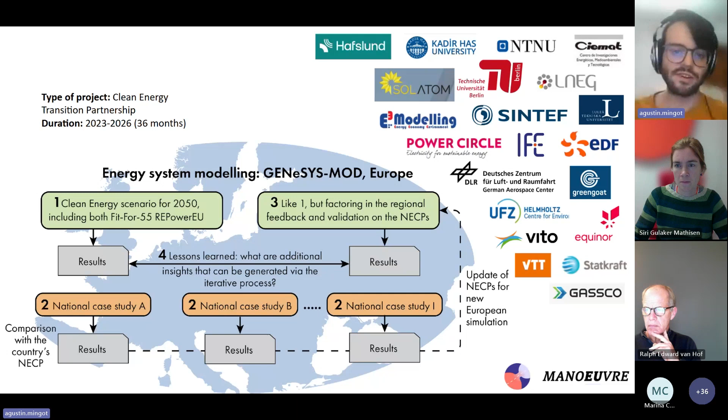Inside this project, at Solatom and also Ciemat and others, we are working in power to heat and thermal energy storage. At Solatom, we are a solar thermal energy for industry company, and we see this energy as complementary.

I will not go into the specifics of the technical design of this equipment, as other presentations will cover that. I want to focus on the importance of this design for the general simulation, for the future and prediction of it, because when designing a power to heat system, there are certain characteristics that are intrinsic to the design.

Any renewable energy has to define what peak energy output it can deliver, what total annual energy it will produce, and what would be the cost of that energy produced. We work commercially, and the balance of these points is crucial for bringing this energy into reality.

There are also more specific points we have considered when working with industry. When will you introduce the heat? Where - are you going to generate steam and add it to the collector? Are you introducing heat into the conventional boiler? Are you boosting the water return from the condensate? Are you working with direct renewable generation, or are you including thermal storage?

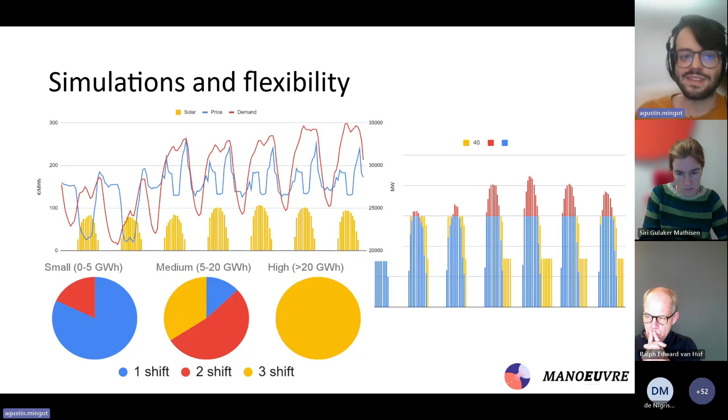So what are the challenges and what are the benefits of doing this reasoning? Well, as we will see, there are many different ways to do power to heat. For example, in our case we are considering using a direct thermal resistance, but heat pumps offer a great deal of efficiency.

You have to quantify what is the limiting factor for the entire power to heat technology. In this case it's electricity, but you have to define this in a way that you can introduce it into your system, getting a dispatch power inside the simulation.

What is the advantage or disadvantage of each specific configuration you could do in a real case construction? Is it worth it to introduce the heat directly into the process, in the collector, in the preheating? Consider all these options, study them, and introduce them again into the general system so you can elevate those results to a general European point.

Is it worth it to hybridize? Well, that is a big question for a power to heat, thermal energy storage, and solar system. It is a complex interlocking system, and we are going to build a prototype to actually know how it behaves, to better characterize it.

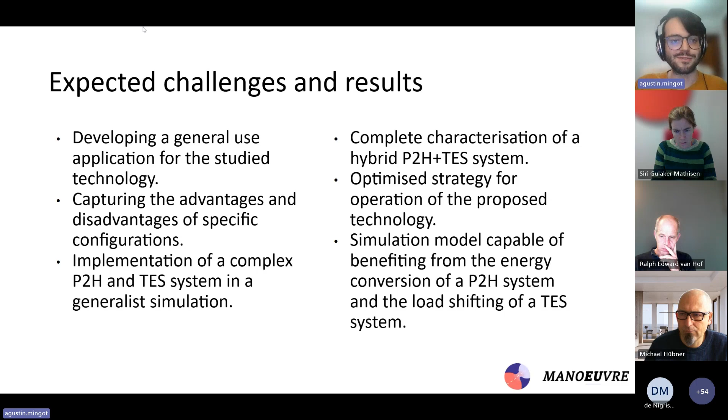You need to be able to account for changing circumstances to make usable predictions for the future. And well, that's how I want to finish my presentation. I think there are only specific questions, or we will go to the next presentation.

Thank you very much, Agustin. Your last message is very strong: you need flexible simulation to flexibly simulate flexibility in the system. I think it's a very nested idea, and it is difficult to explain in a reasonable way, but I hope you have done a good job of doing it.

You were very clear, and I think the system that you are developing is quite interesting also, especially if we look at scenario analysis, because at the end, the planning and the activity you are looking at is essentially linked with scenario analysis. And of course, scenario analyses are not predictions, they are what-if simulations. The idea is to try to understand what would happen in case of availability of a given source, related not only to technical aspects, but also to cost aspects - capex and cost of energy. I think you explained it quite well, and this is a good basis also for the next discussion. Thank you very much.

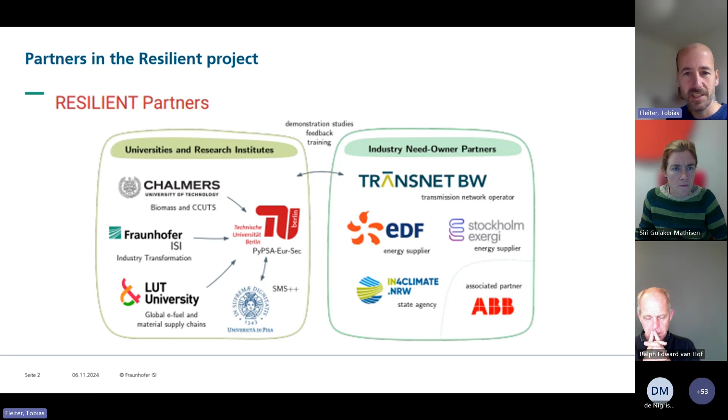I rather want to show you some interesting first results. The motivation, I think, is clear. In the past, for such kinds of studies, in order to motivate them, we looked at results from system models for future years. Now we are actually at a point where the transition is really ongoing and quite upscaled already, so we can simply look at the past. What we see here is for Germany.

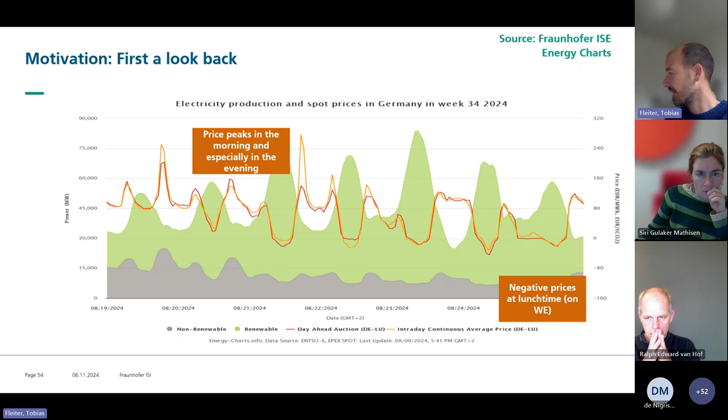This is a summer week this year, not too long ago. The red line is the power prices, wholesale prices, and the areas are the generation - green from renewables and gray from fossils. In the green area we see these typical summer peaks with a lot of installed PV capacity, and we can see that prices follow these generation peaks. We typically have price peaks in the morning, but even more in the evening when demand load is still high but PV generation is already down. We also increasingly see negative prices - this often happens at weekends when load is quite low and there's a lot of generation from PV happening. So then, the question of demand side flexibility, industry flexibility is on the table.

Let's now look a bit at what we looked at. First of all, it is important to anticipate the change expected, or likely to happen, in the structure of industrial energy demand. While today we've got electricity demand mostly used for mechanical energy, and process heating is nearly fully supplied by fossil fuels, mainly natural gas, this is expected to change dramatically in the coming decades.

Hydrogen and electricity are expected to take a strong role in that. We see here a scenario for Germany. What I actually have results for in this presentation, and we can discuss applicability for other countries in the discussion later on. There's a substantial demand for hydrogen from the transition to climate neutral industry, going up to 300 terawatt hours, but it depends a lot on what the chemical industry is going to do and what kind of feedstocks they're going to use.

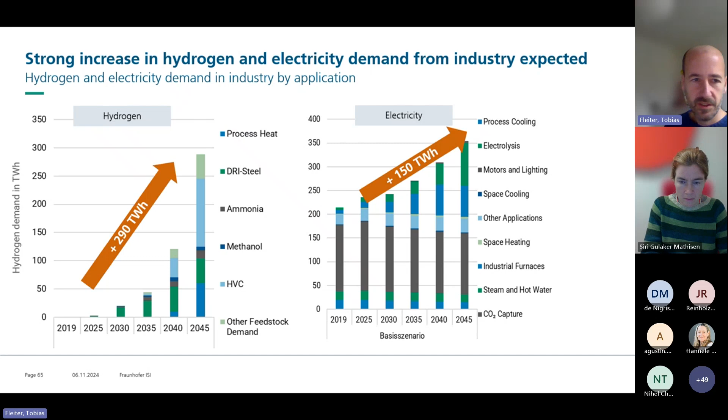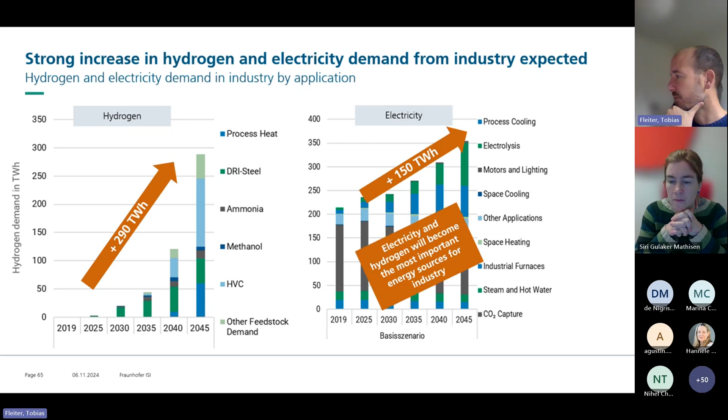But of course, the hydrogen also needs to be generated. If this is done via electrolysis, which will have a very high share, this generates a very substantial additional electricity demand. So this is the setup, the background for the system and systems results that we see very soon. Now looking more at the system perspective and at the energy system model.

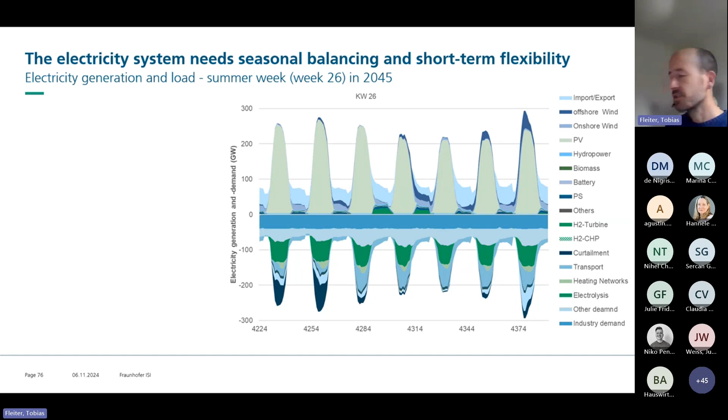And there you see already how much flexibility is already in the system, because the load follows very much these PV peaks. There is, of course, also curtailment, but there is a lot of flexibility from hydrogen generation via electrolysis. There's also a lot of flexibility already from vehicle to grid, and of course many other flexibility sources.

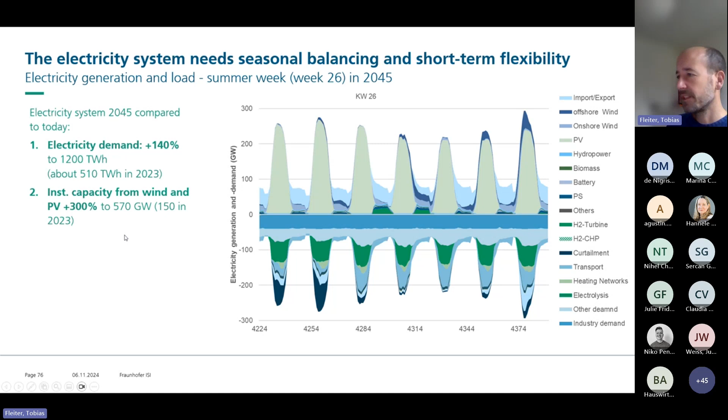To summarize a few figures: overall demand goes up by roughly 140% on top - from 500 to 1,200 terawatt hours. Installed capacity from wind and PV increases by 300%, to more than 500 gigawatts. And also the load, as you see here, is going to a maximum of 300 gigawatts.

And of course, this has then also strong requirements for flexibility, but also potentials for new business models. We looked at flexibility from classical processes, or from processes that are already electrified today - so mainly mechanical energies, also maybe some cooling processes here and there.

And we come to a total aggregated figure of 5 gigawatts of load that could be shifted for a duration of about 4 hours. Of course, if you compare this to the total load and generation numbers that go up to 300 gigawatts, it is a small share. So that's why we think the flexibility in these already electrified processes can play a role, but it's also important to have a realistic estimate of the overall potential on the energy system.

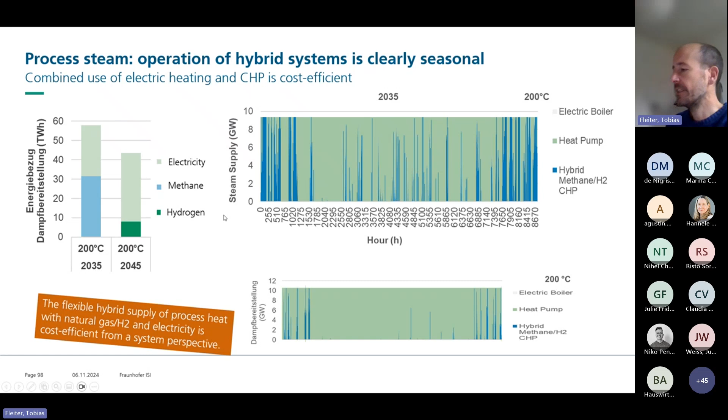We actually see an interesting pattern where mostly electricity is cheaper than hydrogen during summer when we have more PV generation, and hydrogen on the other side is often cheaper than electricity during winter, when, for example, hydrogen is also used for electricity generation in times of low wind and PV production. Hydrogen also - this model also uses large-scale hydrogen storage for seasonal storage, so hydrogen can be better stored for winter operation, and so has price advantages during winter time.

And that of course is the basis, or one of the explanations, for the operation of the hybrid systems we've seen in a slide earlier on. Very quickly, we also looked at - we did a few first test runs for flexibility of hydrogen and natural gas in steel generation.

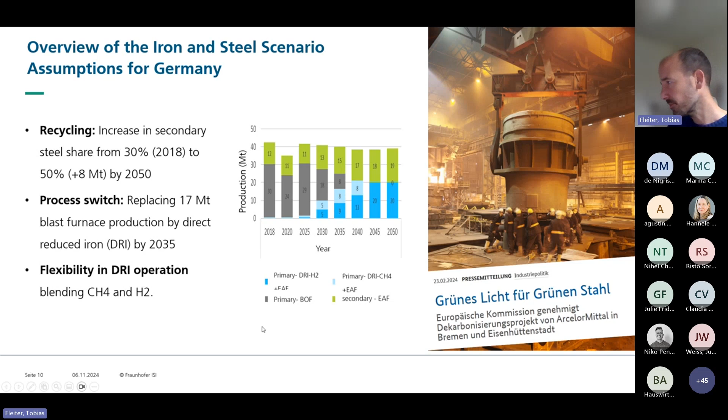As you might know, many steel producers are now planning or even started to replace current coal-based blast furnace plants by direct reduction plants. These direct reduction plants can use basically methane, natural gas, or hydrogen. They can also relatively flexibly blend both, so they could use hydrogen according to prices and availability, which is especially important during a time when the hydrogen system is being built up and still not fully functional, when prices might fluctuate heavily and availability is also not always as good. So here we developed a scenario for the future uptake, and we see an interesting pattern.

We see that this is the production - actually the energy demand for the production of direct reduced iron over one year, 2035 - and we've given the model one side condition: it should use at least 50% hydrogen over the year, but can choose at which hours, or how the operation schedule is.

The schedule is then actually optimized, and we see that this cost optimal solution has, during winter times, a full use of natural gas, and then during summer times, a strong use of hydrogen - also reflecting what we've seen earlier on about the electricity and hydrogen prices.

And this, of course, also is a kind of seasonal storage. So it provides this strongly seasonal profile.

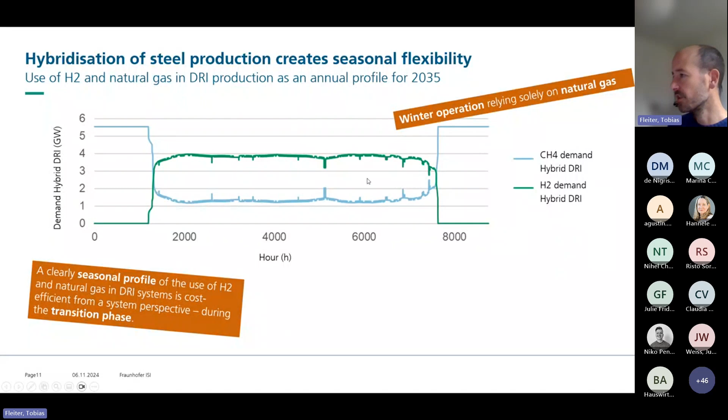And yes, very quickly, the core results. First, I already mentioned the future system will be highly wind and PV dominated. Flexibility will become more important.

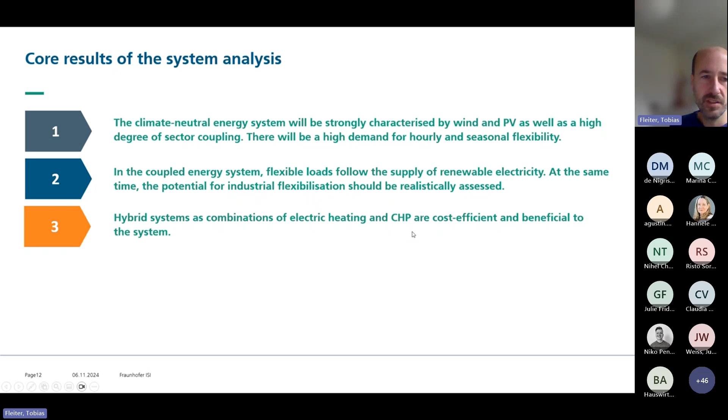More specifically, we see that hybrid systems for process heat generation, electric heating and CHP, or in the future electric heating and hydrogen CHP, are very cost efficient and beneficial to the overall energy system. Probably initially heat pumps or electric boilers supplementing gas-fired CHP or gas-fired boilers, and then in the future upscaling it, increasing the share of generation from the electric generators.

And for the steel sector, but also applicable to other high temperature process heating, we see that this upscaling of hydrogen use, the uptake of hydrogen use, should be flexible in the transition period, in order to provide flexibility to the build-up of the entire system.

And with this, in these directions, we continue now in the resilient project methodologically wise. And with this, I would like to thank you for your attention and look forward to the discussion.

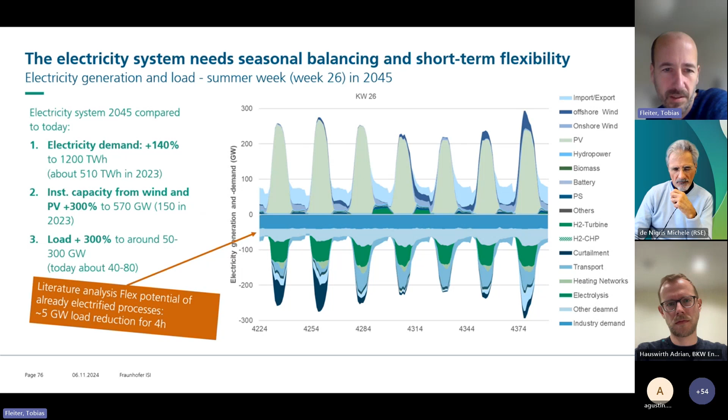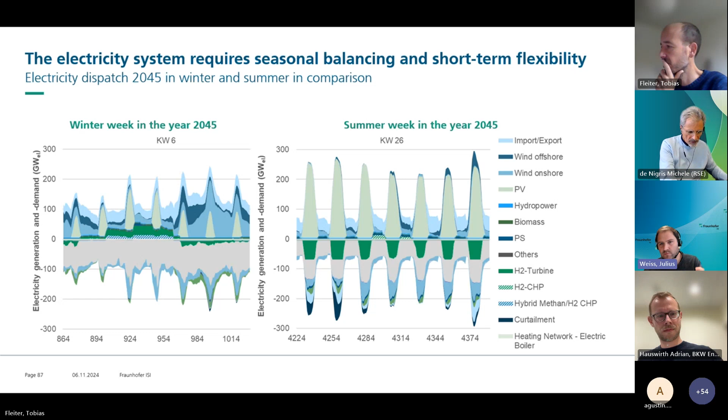Thanks, Tobias, for the interesting talk. For me, it would be interesting to hear a bit more on these price scenarios for the future hydrogen and electricity prices, and which kind of grid fees did you consider and the formation of the prices on the market. Is the grid fees considered, and what is the spread there?

And the other question I had when looking at this is, did you consider a European energy exchange in your simulations, or is this just Germany isolated, basically, that you try to fulfill the demand of Germany in your model?

Maybe a few quick words. It's always problematic to show in such a short time results of a complex modeling study because you cannot present all the assumptions. But this was a European-wide calculation, and one key flexibility is transmission between the countries, transmission of hydrogen and electricity, build-up of hydrogen storage across the continent. So there's actually a lot of solar and wind deployment at the cheapest locations in Europe, and then also transporting to countries like Germany with less good potentials. So yes, this drives a lot the overall results.

And quickly on the price, it's maybe called shadow prices here. It's maybe a bit more the cost actually, so this is not the kind of end user prices or something. It's more really the relation of the cost of these two energy carriers, just to compare within the system logic what is their competitiveness at certain points in time. But it needs to be translated still when you want to say something about what would be the electricity or hydrogen price that industry or households could procure.

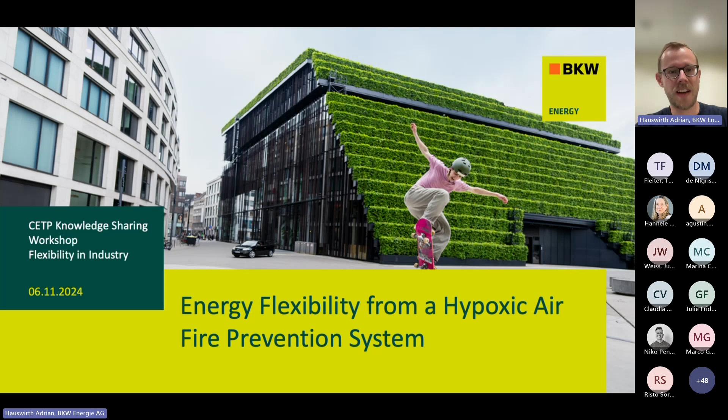So hello everyone. With this presentation, we're coming back from the continental or national scale and the gigawatt scale to the very local kilowatt scale flexibility. What I want to do is talk about how we're looking into using an industrial fire prevention system for energy flexibility, and that's in the scope of the CoPress project, as was already said.

Very quickly, my name is Adrian. I'm working for BKW, a Swiss-based energy company, or originally it was. Nowadays, we're more of an infrastructure services company in the building and energy domain, and we still have our headquarters in Switzerland, but over 200 subsidiaries all over Europe.

But now, the topic of today is that very specific source of energy flexibility that we have identified on our Swiss pilot site for the CoPress project, and that is the fire prevention system. I'll quickly go through the concept behind it and the context of our CoPress pilot site in Switzerland, before then sharing some initial estimates on the flexibility that we expect to harness from the system.

The fire prevention system that we want to leverage for flexibility is based on the very simple principle that you can put out a fire by starving it from oxygen. Moreover, if you are in an atmosphere that is sufficiently low on oxygen, a fire cannot spread. It may not even break out. And therefore, a very effective fire safety measure is to keep high-value assets in a so-called hypoxic environment.

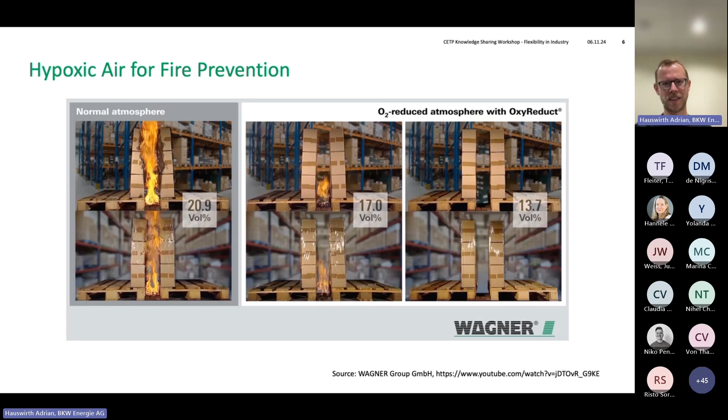Examples where these systems are used are especially data centers and warehouses, warehouses that, for instance, store flammable objects. There are different ways to create such a hypoxic environment in a closed space.

The process that we consider uses compressed air, because with compressed air you can drive a process called pressure swing absorption, and with this process you can separate oxygen from the air. The separation, at least for the sake of fire prevention, does not need to be perfect, but the important thing is that you get out hypoxic air that is sufficiently low in oxygen.

This hypoxic air is then pumped into the spaces that you want to protect from fire. These protected rooms nevertheless have doors, they have openings, and therefore you have leakage of the hypoxic air. Or more precisely, you have oxygen, high oxygen air, or ambient air that will penetrate back into the space and raise the oxygen concentration again.

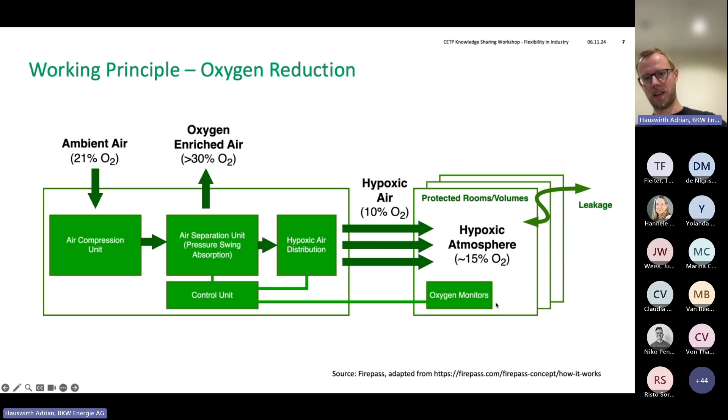So what you'll need normally are oxygen monitors in the protected volumes and a control unit that will keep the oxygen concentration in those protected rooms and warehouses at a specific level.

This is where you can probably guess that this type of creating a hypoxic atmosphere is very similar to thermal storage. Namely, you can control the oxygen concentration in a room similarly to controlling the temperature. You can drive down the oxygen concentration by using, in this case, electric energy to produce compressed air, which you then can use to create this hypoxic air.

But if you don't produce the hypoxic air, the O2 concentration will slowly rise again. And in the same way that you can give a desired temperature range to a thermostat in a room, you can have a range of admissible oxygen concentrations.

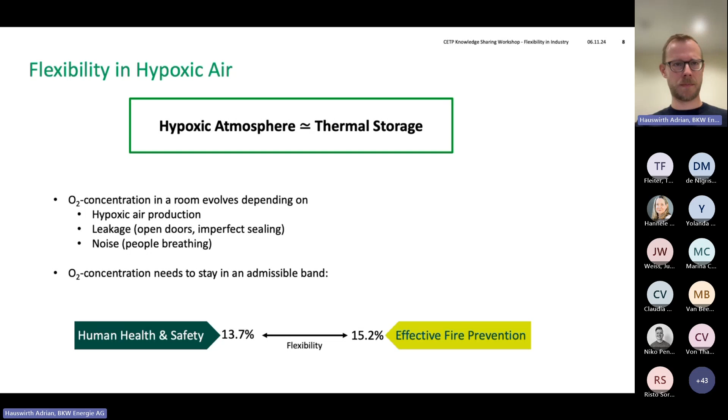The constraints that you have are, on one hand, that the oxygen concentration cannot be too low, otherwise it poses a safety risk for the people who work in that room, even if it's usually just for maintenance, but still the room has to be accessible for people to do work in there. And on the other hand, if the oxygen concentration is too high, your fire prevention is less effective. But nevertheless, you have this interval of oxygen concentrations that you can play with, that you can use to provide flexibility. So far about the general concept of this hypoxic air fire prevention.

Now let me give you a quick overview of our CoPress pilot site in Switzerland, where we have such a system that we can control, or at least partly. The pilot site is part of our use case 1 of the Swiss part of the CoPress project, which aims at looking into how we can increase the profitability of local energy systems by means of intelligent building automation.

For this purpose, we're partnering with an energy planning company that is itself a BKW subsidiary. This energy planning company has one client that is a large logistics company, and they have this warehouse complex in Switzerland that has a pretty complicated energy system. However, they are very open to testing out new energy management techniques that can bring down their energy costs.

In particular, what we are interested in the context of CoPress, but what also is of high interest to this client, is peak shaving of their electricity consumption. They want to optimize their self-consumption from their locally produced PV power, and potentially they want to be able to sell their flexibility as ancillary services, especially secondary and tertiary reserves.

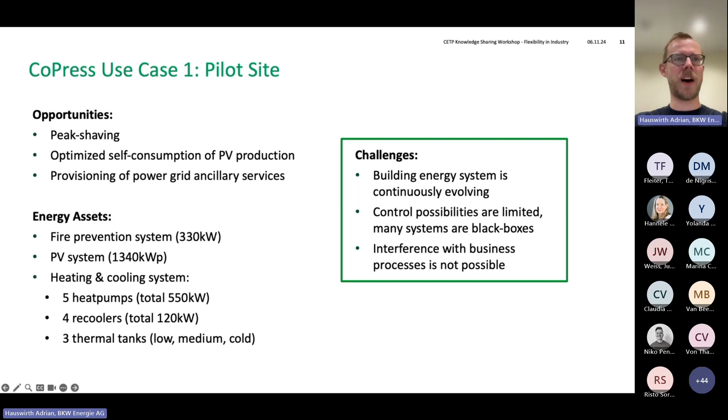So, given this situation, we decided to focus a bit on the fire prevention system, because we have a very good idea of what it does. It's fairly isolated from the rest of the local energy system, and it's something special that you don't find on every industrial site.

Now let's dive a bit deeper into the specific system installed on site. We have 4 air compressors in operation, soon there will be 2 more, and all of them feed into a compressed air network that spans the entire complex. The air separation units that constitute the fire prevention system are not the only consumers of this compressed air. We have pneumatic machinery and doors that also consume some of it, and these enter our view of the system as a source of noise, as you'll see in a moment.

We have a number of measurements here. Most importantly, the average oxygen concentration in the storage modules, and also the aggregated electricity consumption of the air compressors.

On the control side, things look a bit more reduced, because we essentially have control over one single storage module here. Might be a second one soon, but still we can control one set point, and even that only in a binary fashion. We can set the set point for the O2 concentration at a higher value or a lower value, and that's all we can do with this system.

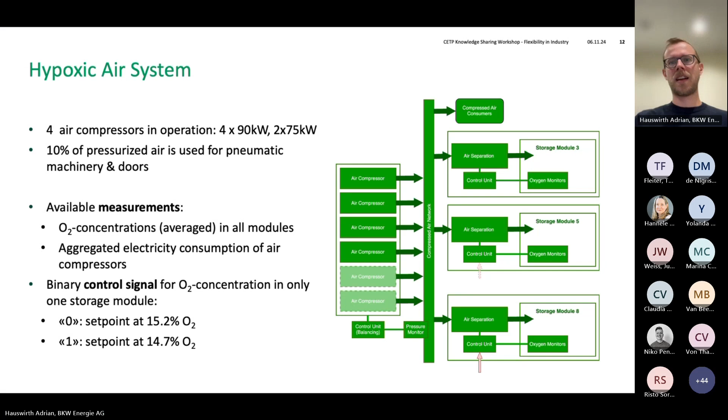Nevertheless, in the last couple of months we were able to collect some high-quality data that has enabled us to better understand the system behavior. We now have one month of usable data, which is not a lot, but which is representative of the general complexity of working with this real system, in this context of having an actual industrial partner that lets us control their assets.

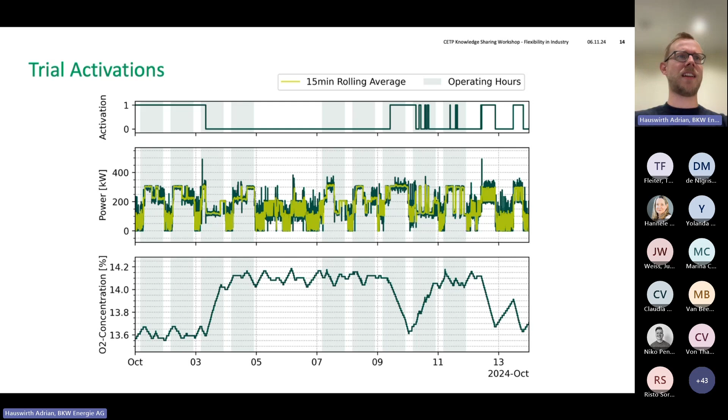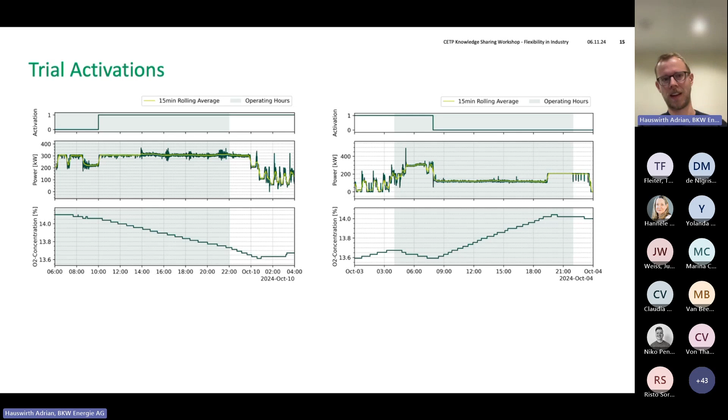So just looking at these signals and getting these insights, we're able to have a very rough flexibility estimation on this system. One important thing we noticed is that we have to distinguish between the system during operating hours, when people are working in the warehouse, because then you have a lot more doors opening and closing, meaning more leakage of this hypoxic air. That in return means a higher average consumption to maintain your desired oxygen concentration, which on the flexibility side means you have a pretty good down regulation potential, even though just for a few hours, because the air compressors have to run soon enough to catch the O2 concentration from rising too much.

Outside of operating hours, the situation looks very different, because there the leakage is very low. So the air compressors on average have to work less, meaning that by trying to completely switch them off, you're not reducing consumption by that much. However, you could sustain it for quite a long time. On the other hand, your upregulation potential is then much higher, even though again for a shorter amount of time.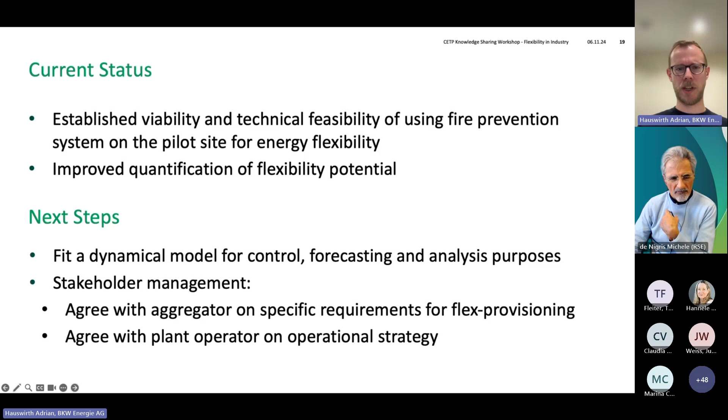So currently we're working on a proper well-fitted dynamical model that we can use for control and forecasting. But more importantly, we need to go back and work out with the stakeholders on site exactly what they want this flexibility to be used for, be it peak shaving, self-consumption optimization, or provisioning of flexibility, and how we can best leverage that flexibility. With that, I close my presentation and thank you very much for your attention.

Thank you very much, Adrian. Very, very interesting and unconventional applications.

Quite interesting. Just a question which has very little to do with flexibility: do the operators inside the warehouse operate with oxygen masks and things of this kind? I would expect that if they don't, they are very lazy inside. But I don't know—I've only been informed of the admissible oxygen concentration, the lower end. How exactly it works and what the safety precautions are, I'm not aware of.

Probably this is a very good application of robots and artificial intelligence. Thank you. Thank you very, very much.

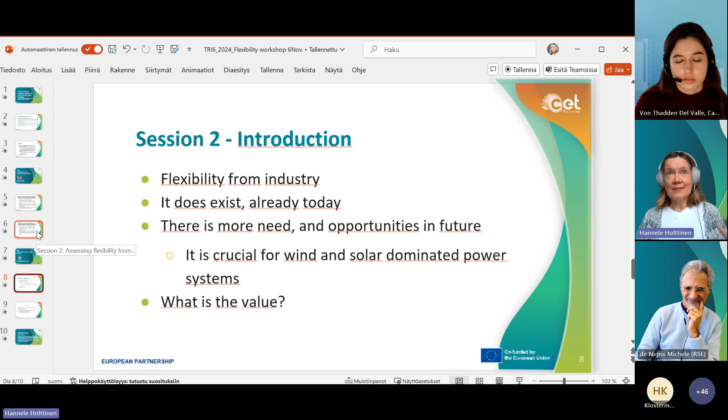Thank you. And then the big question is: what is the value, and how can we incentivize this flexibility from industry? With this, I will give the floor and screen to the presentations. So first we will have the ISSDemo project, presented by Carlota von Thadden del Valle. So please, try to share your screen and give the first presentation. Thank you.

Perfect, thank you. Can you hear me and see the screen now? Yes, all is very well. So hello from my side. My name is Carlota von Thadden del Valle, and I'm from the Fraunhofer Institute Umsicht in Oberhausen, Germany.

Today I will be talking about a part of our project within Transition Initiative 6, the ISSDemo project, and the integrability of high temperature thermal storage for steam in different industries. Just an outline of my presentation: I will first introduce the ISSDemo project, then go on to how this specific latent heat storage can be applied in different industrial sectors. I'll take a closer look at one of our main case studies, the brewery, and then connect it to today's topic of flexibility and its aspects.

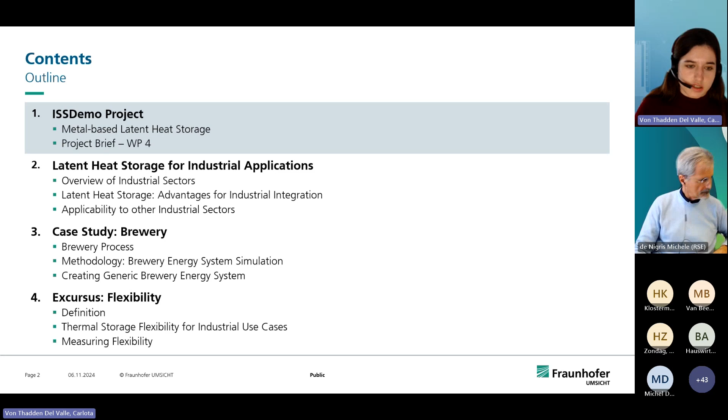So the ISSDemo project is also an international collaboration with partners from Spain and Poland. Our main objective is to develop a metal-based latent heat storage for high temperature applications, so between 250 to 500 degrees Celsius, with main focus on industries that utilize steam as a process medium. The storage itself is currently on TRL5 and will be developed to TRL7.

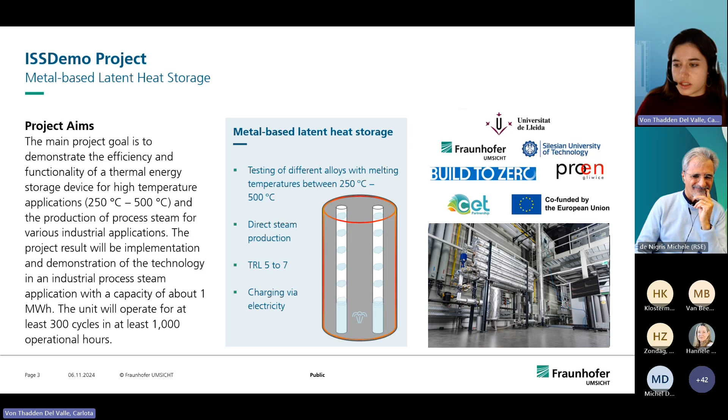But as we are an applied research institute, we try to also look at the industrial side of it. So alongside the actual technical development of the storage, we have specific case studies for the implementation of this storage into the industrial systems. Also relevant for today's topic of flexibility is that the storage will be charged via electricity and discharge steam.

So what this means is that from these sectors, we try to create more like an example energy system using data from our industry partners within the project, but also just literature research. And then this will be dynamically modeled and simulated in Modelica in the software Dymola. The thermal storage will be integrated in here. So also part of this applied research theory is that apart from the pure technical development where we get information on the storage, we also feed back information on the actual industrial requirements for the storage and what we would suggest to implement in the storage development.

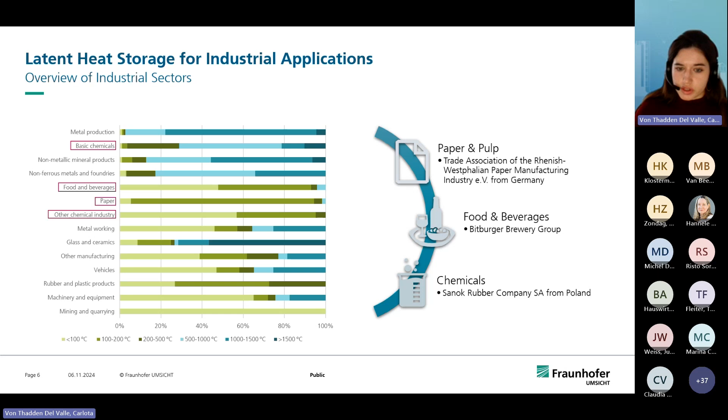Just briefly, latent heat storage, and why I've shown this temperature range as well, typically utilizes the latent heat, which is the heat from the phase change. So when going from solid to liquid in our case, so the melting process of these installed phase change materials, in our case these metal alloys. Hence the temperature at this point is stable at the melting temperature. Hence it is typically used for processes that have a similar temperature range.

The high temperature latent heat storages are, however, less developed than sensible heat storages in that temperature range, but they offer other benefits, as I explained, the process stability and efficiency, as the temperature during discharge is relatively constant, as well as the steam pressure that we can discharge. And due to the higher storage capacity because of the material, it requires less space for installation on site.

Generally, there are different options for charging and discharging thermal storages. In our case, the thermal storage will be charged electrically.

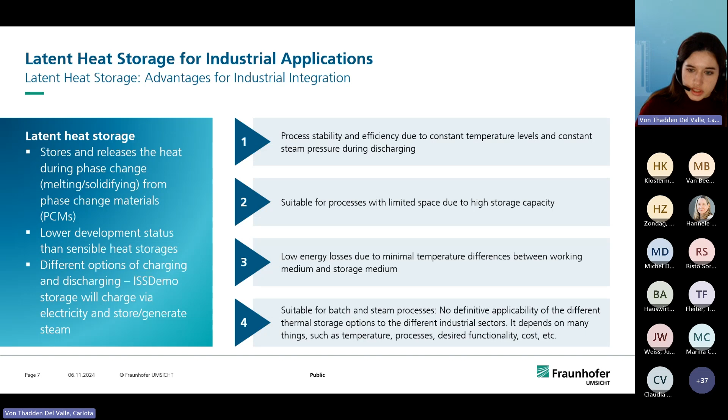Because there is no clear or direct advice on which storage to apply to which industrial sector, I've just written out a few of the aspects that you can consider, or we can consider, in the case of finding the suitability of our storage to the industrial sectors.

So as I mentioned, the storage is both a steam generating as well as storing device. So it can be applied to industries that utilize steam for their production processes, such as drying in the paper industry, boiling in the food and beverage industry, etc.

Generally, thermal storages are highly considered for all batch processes - processes done one after the other instead of mass production done simultaneously. In this case, you can store heat for later usage. These are processes typically occurring in the beverage industry, dairy processing, and pharmaceutical products such as soap, biotech, as well as other manufacturing.

As I showed before, the temperature range is also indicative of the suitability for storage. So you could match and overlap this operating temperature of the storage to industrial sectors, which I've just picked a few - chemicals, food and beverages, paper, rubber and plastic, pharmaceutical, etc.

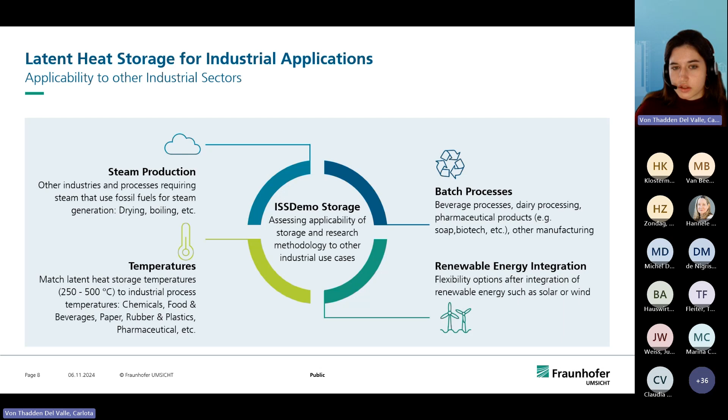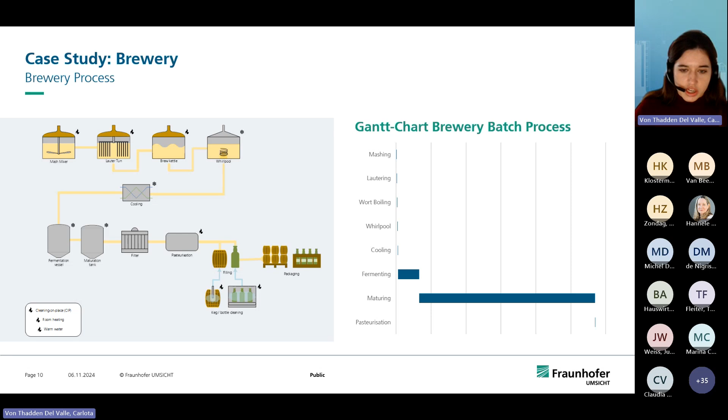Alongside the project, we have tried to generalize this system as one of the industrial energy systems. In the first step, we used Bitburger data to integrate the model of the storage so far and analyze how it would fit in there. But now in this phase, we are creating a general brewery energy system with its demands, which is done by reducing the components from the Bitburger system to the main ones.

That we can find in other breweries as well. This is also validated and looked at through our literature research. And then through methodologies such as scaling, we maintain the confidentiality of Bitburger data. In the last phase is, as I mentioned, the actual simulations of the thermal storage in that system. So this is what it would conceptually look like.

Basically, I am comparing here the integration of the storage to conventional methods, as well as relatively conventional renewable integration methods into the system. So I have the latent heat storage here in the center with two components - one which is a storing component, one which we consider like a direct steam generation, so the power to heat component of our storage.

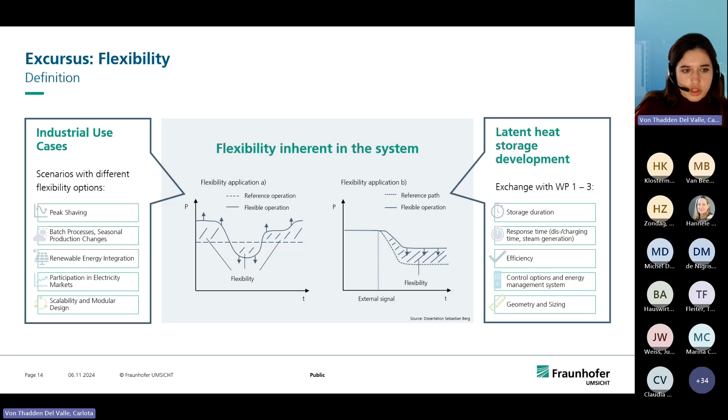This form of definition I would associate more with the actual development of the storage - what the work packages 1, 2, 3 are currently doing, because I associate it with what storage duration I have and what is the response time. So for charging and discharging, as well as for steam generation, what is the efficiency of the storage and what control options are in place, as well as how the connection to energy management systems looks, but also things such as the actual geometry of the storage and the sizing influence this kind of flexibility. The flexibility that our team is looking at within the project considers aspects that apply more to the first operation, which I'll show here in more detail.

One aspect is the adaptability to variable production cycles. We've talked about the brewing process being a batch process, but it also has seasonal peaks, and the topic of peak shaving is relevant here. The storage is supposed to be modular, so we're looking into what size and scale makes sense for the industry, but also the aspect of integrating renewable energies, specifically volatile sources like solar and wind. And obviously the main topic of reducing cost when integrating flexibility in energy efficient systems, as well as the market participation aspect.

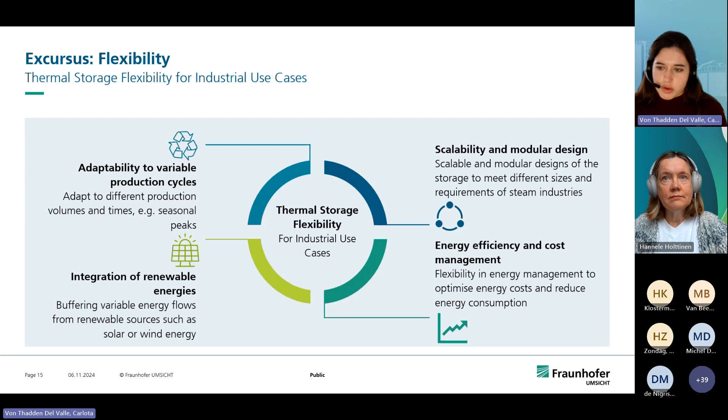So all these aspects are then quantified, looking at it from a systemic, ecological, and economic point of view. Systemically, we're looking to increase energy efficiency and have increased waste heat generation integration in the system. Ecologically, a reduction of fossil fuels is obviously the aim, as well as an increased lifetime through good operation, especially of charging and discharging of the storage. And economically, when looking at storage, we often talk about the levelized cost of storage, so reducing that as well as reducing general costs for electricity.

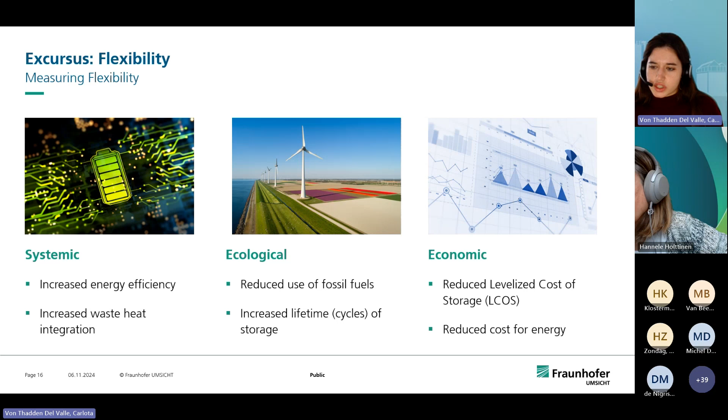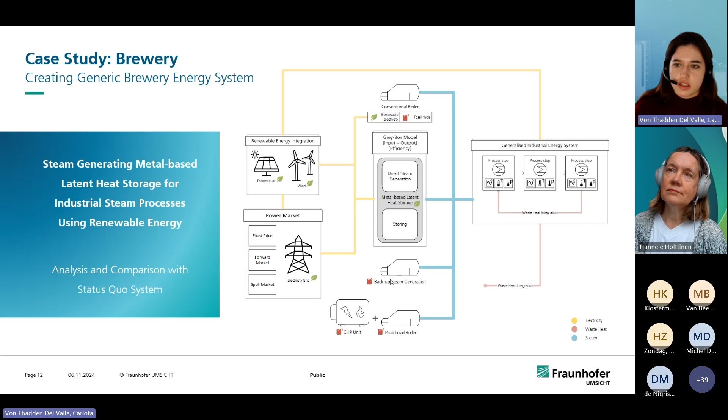And that is, if I can come back to it, the objective here as well - reducing all these fossil fuel aspects, reducing the cost, and increasing the efficiency of the system.

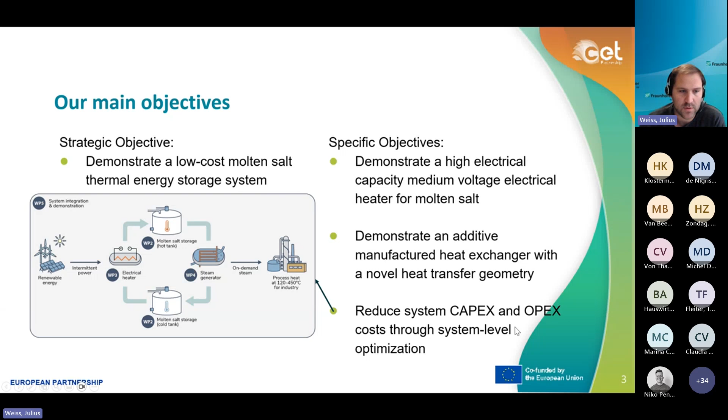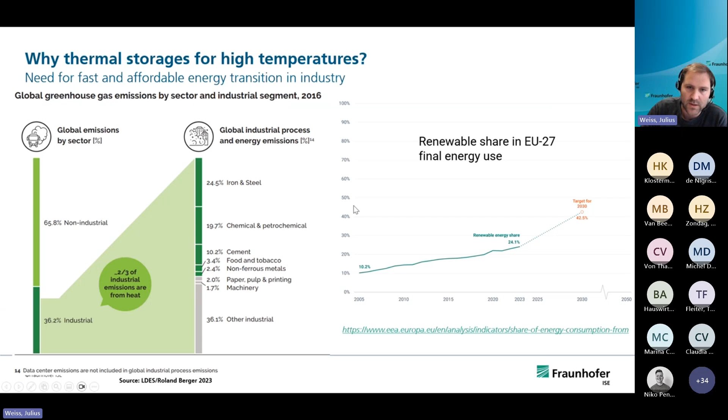A few words on the motivation - right now we have the situation that 1/3 of global greenhouse gas emissions come from industry, and 2/3 of that is coming from emissions related to supplying heat. The other fact is that we have more and more renewable share in Europe in the coming years. With this, we have to focus on how to match the intermittent renewable energy production and the constant demand of industries. We already had a look at this Fraunhofer ISE energy charts beforehand.

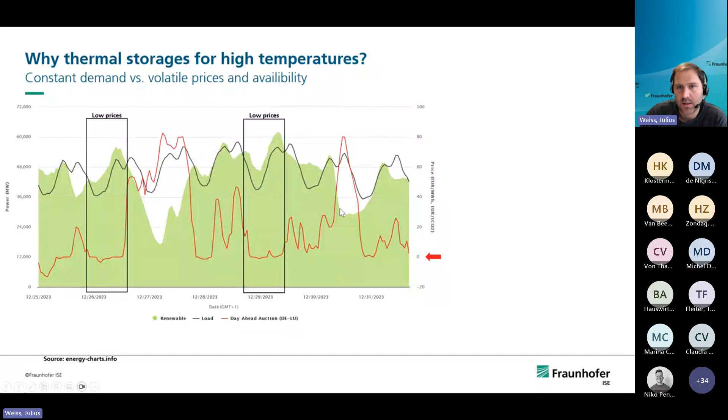What we can see is, when the renewable energy production exceeds the demand, we have low prices or even negative prices. And then there are periods where the demand is exceeding the renewable energy production. These are the periods with high prices, and this is exactly the flexibility that we need.

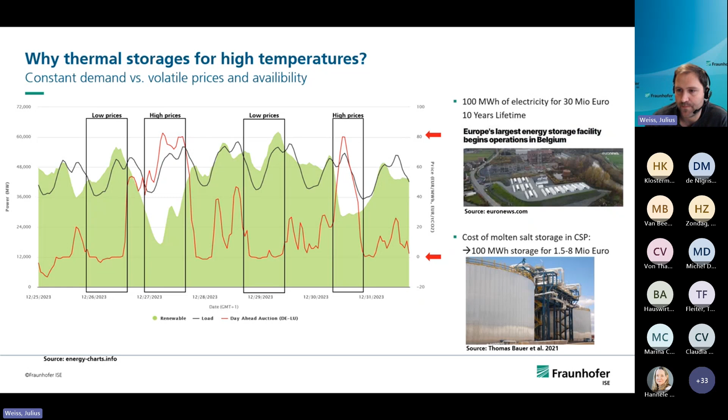There would be the solution of just using electrochemical batteries. But last year there was a project with 100 megawatt hours of storage costing 30 million euros with a lifetime of 10 years. On the other hand, we have this molten salt storage technology used in CSP power plants. When we look at the prices there, for a similar size of storage with a longer lifetime of 25 years plus, we get less capex cost on investment. So this is the main motivation.

We want to have an economic opportunity with low-cost renewables, and we have the power-to-heat technology.

Maybe you can mute yourself. And Michael, can you mute yourself? Yeah, thanks.

Now the question is how to integrate the system. On one hand, we have the electricity going into the electric resistance heater with high efficiency. We have a heat transfer fluid, which is solar salt for today's presentation, but within the Locomosa project we're also looking at other salt mixtures. This solar salt is heated up, stored in a hot tank, and used on demand to produce steam for the industry. It's then cooled down, stored in a cold tank, and this closes the cycle.

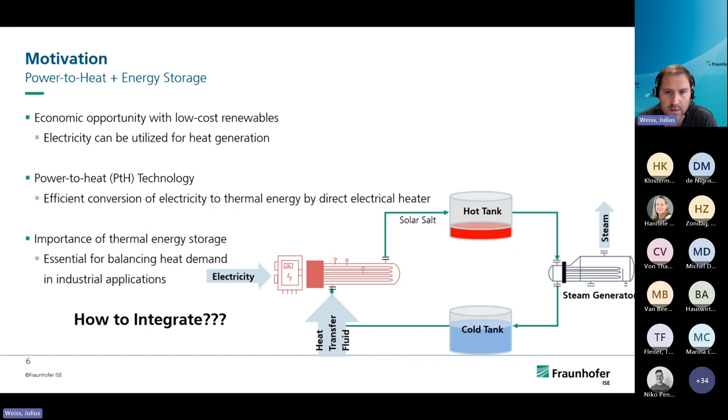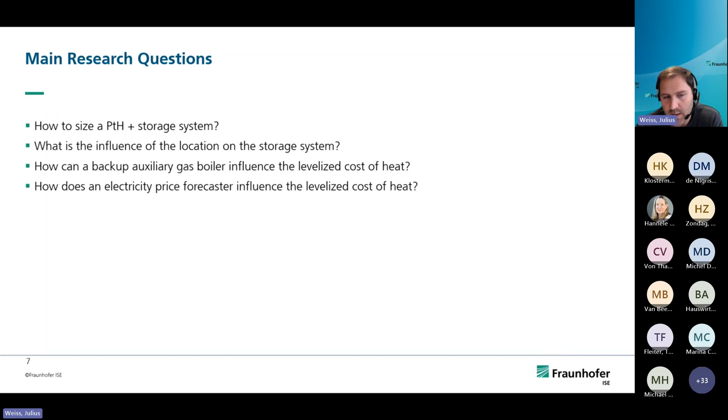The main questions I want to discuss today are how to size the power-to-heat and storage system, what is the influence of the location of the storage system, how could a backup auxiliary gas boiler influence the levelized cost of heat, and how does the electricity price forecast influence the levelized cost of heat. I have to admit the numbers and figures I present today are not final, but I think it's still interesting to look at these results in order to discuss something specific later on.

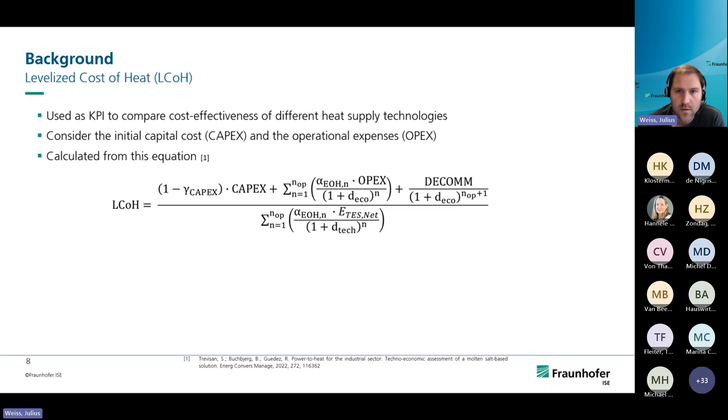Our evaluation is based on the levelized cost of heat. Because of time, I won't go into detail on the calculation, but basically there's some lifetime considered, some financing factor of external funding, decommissioning considerations, certain reinvestments, and technology degradation rate. Then we have a number of cost functions in order to calculate the capex costs.

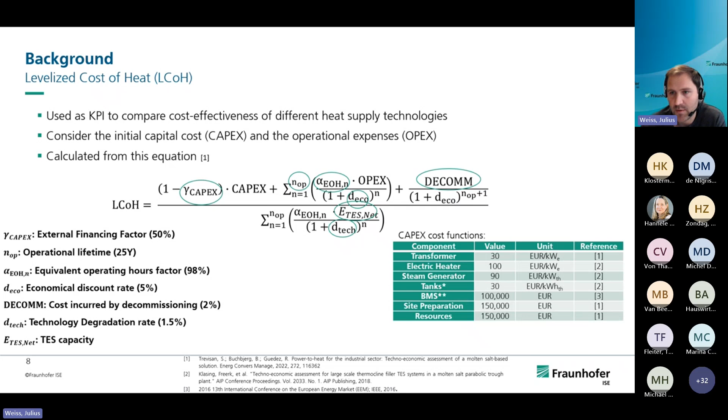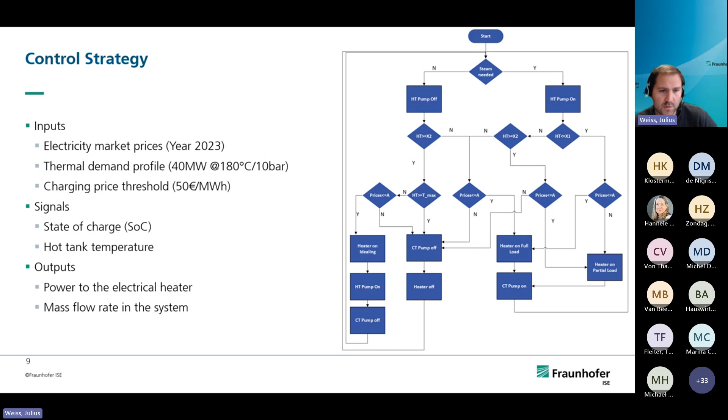Other signals we have are the state of charge of our storage system and the hot tank temperature. The outputs of this controller are the power given to the electrical heater and the mass flow rate in the system. Then there are different operation modes that our system should fulfill.

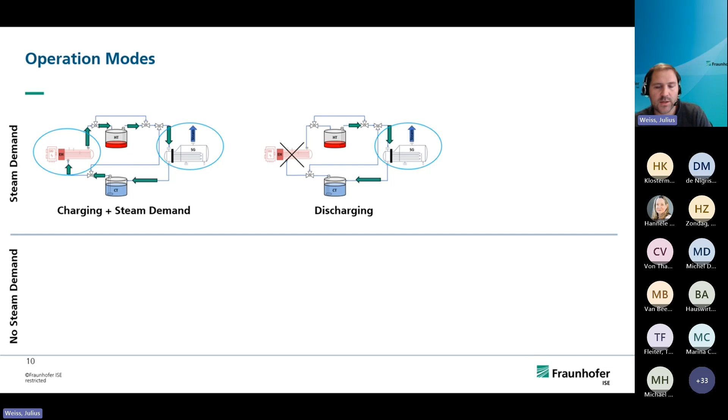Basically we have charging plus steam demand, or discharging where we just have steam demand, and then a base load where we do not charge our system but fulfill our demand by direct electrical heating. Or we have no steam demand, and in this case we can charge our system without a steam demand, or we can lift up the temperature of the hot tank in order to compensate for heat losses over time.

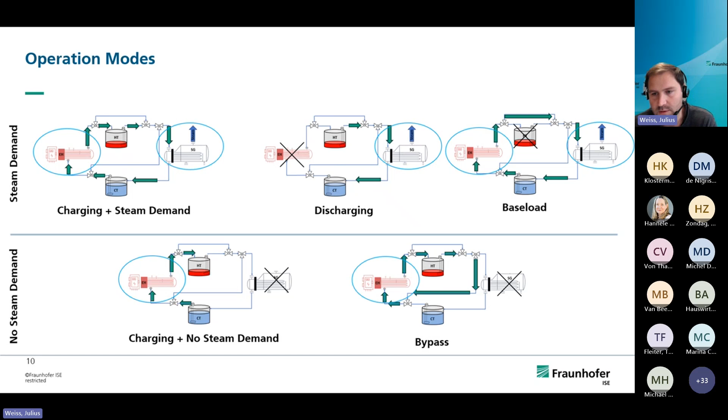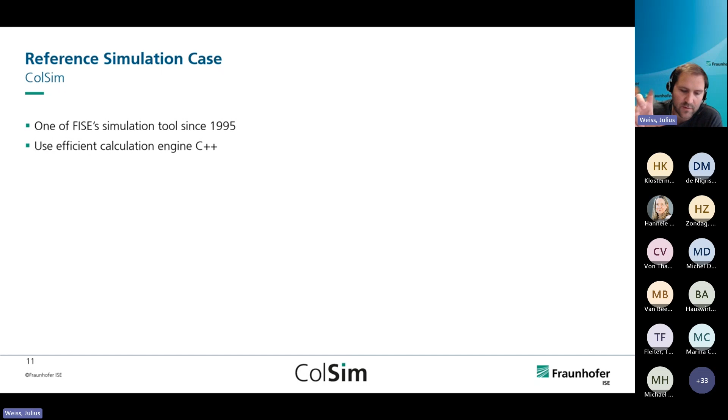We do our simulations within our Fraunhofer ISE in-house system simulation software ColSim, which was originally developed to simulate CSP power plants. This is why we already have all these models existing internally.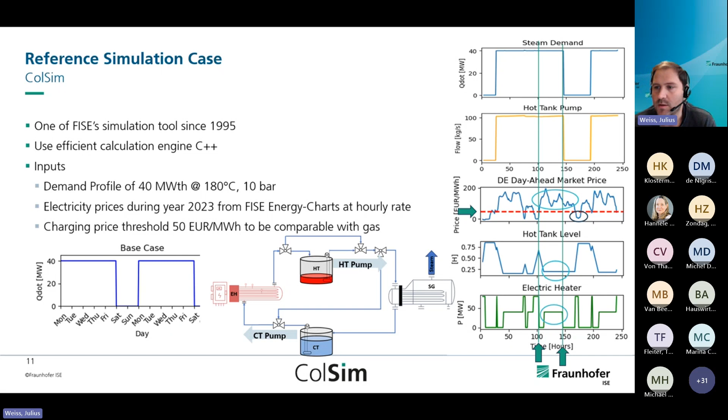Later on, when the steam demand is gone, we can shut off our electrical heater until a point where the prices are lower than the threshold. Just in this period, we can again recharge our storage system. So to keep it simple, basically.

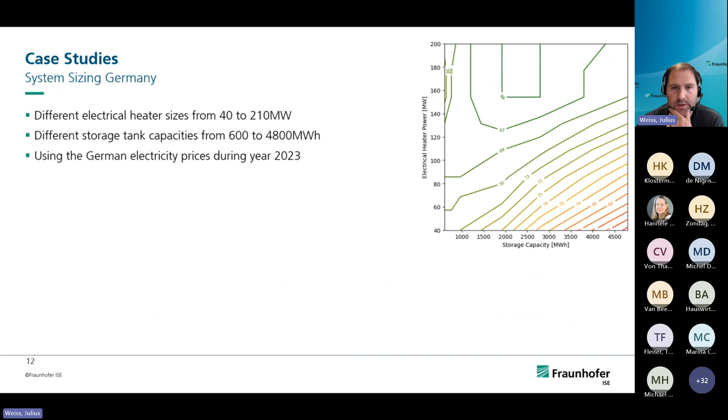So the first case study we want to look at is the system sizing in Germany. We analyzed different electrical heaters on the scale from 40 megawatts to 210 megawatts, and different storage capacities from 600 to 4,800 megawatt hours. And with this study, we can...

Compute these contour plots where we can analyze an optimized match of electrical heater size and storage capacity, and we end up calculating the levelized cost of heat for this system for the prices of 2023. In this case, with the fixed threshold criteria, we end up with a 200 megawatt heater and a 2,880 megawatt hour storage, so we could charge our system within 14.4 hours and discharge in 72 hours.

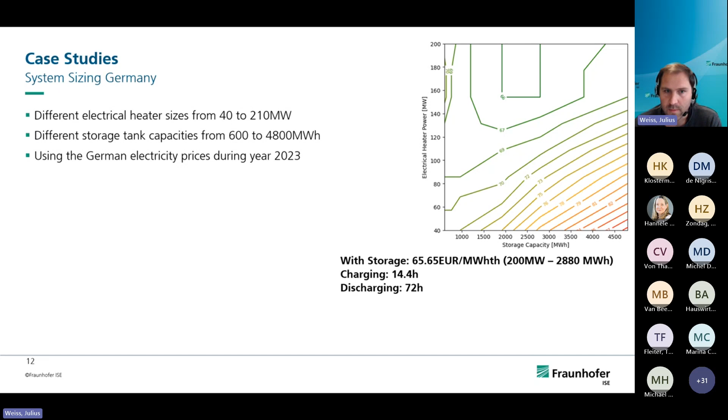But when we look at a more dynamic threshold criteria for charging our system, which looks 3 days ahead and calculates the average price—if it's below the average price we charge, if it's above we discharge the system—we can even further bring down the cost.

Without a storage system, just using electricity from the market, we would have a levelized cost of heat of 71.6 euros per megawatt hour. With the dynamic threshold criteria, we can further decrease the cost to 62.7 euros per megawatt hour.

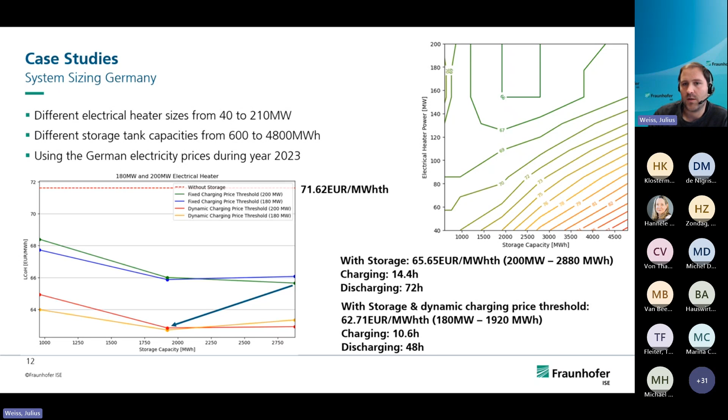What's necessary to mention here is that these figures are not considering grid fees, as they are not fixed right now, and this is still for the year 2023. So this is upcoming work for us.

Having a look at different locations, we analyzed the European market and found that for the year 2023, the Swedish market had the highest price fluctuation during the year, and the Italian market had the highest mean value. So we analyzed these two markets and came up with the same contour plots.

On the left-hand side, the Swedish market, we come up with 50.8 euros per megawatt hour with the 50 euro threshold criteria, but this is the case without storage. With storage, we end up with 45.5 euros per megawatt hour, and a smaller heater and smaller storage capacity.

For the Italian market, using the same threshold criteria of 50 euros per megawatt hour, we are not using our storage at all because the prices are just too high. So we're never charging our system, which is why without storage the levelized cost of heat is even lower than with storage. This was a poor selection to stick with the same criteria here.

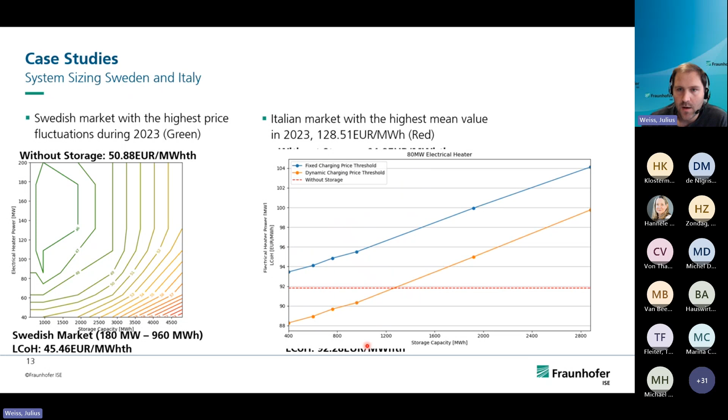But when we analyze again this dynamic threshold criteria of looking 3 days ahead, we can decrease these costs and end up with smaller storage systems, reaching a point where the case without storage is no longer cheaper. We actually have usage of our storage in Italy as well, and we can even further decrease the costs for the Swedish market.

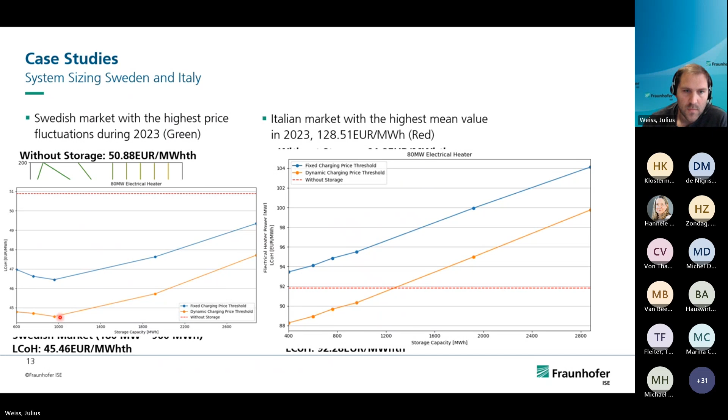Another study we did was looking at the possibility to combine our power-to-heat plus storage system with a backup auxiliary boiler. For the gas, we assumed a cost of 42 euros per megawatt hour, which already includes taxes for CO2 emissions.

Then we can sum up the money we'd have to spend in order to fulfill our steam demand. The blue line is our system without a gas boiler, just power-to-heat plus storage. The orange line is if we just go with the conventional system of a gas boiler, and the green line is if we combine both systems.

So we can make use of the low electricity prices on one hand, but if there are periods of longer high prices, we can use the gas boiler. So this is the combined solution.

Here we can achieve an OPEX reduction of 55% by combining it even today. This is based on specific criteria that we considered, and we have to look deeper into this, but it looks promising that this might already be an interesting thing to do right now.

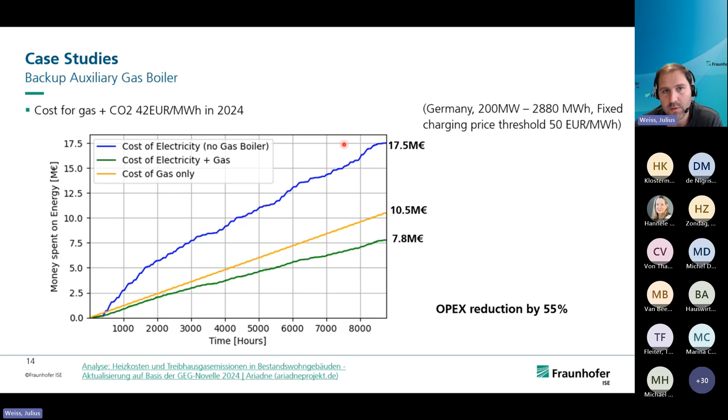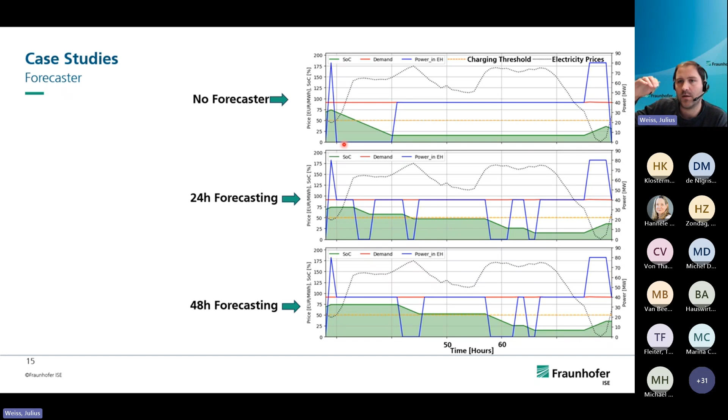Another study I won't go into detail on due to time, but basically we compared the case where I don't have the ability to forecast my prices properly versus if I can forecast my prices one day ahead or several days ahead. Logically, the operation of my system becomes totally different, because I can see right now that in a few days the prices are even higher than the prices exceeding my limit right now.

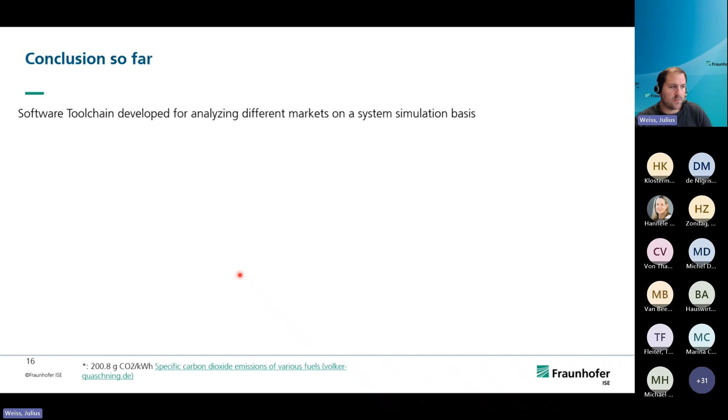So our conclusion so far is that we now have our software toolchain developed to analyze different markets on a system simulation basis, and we can already come to some conclusions, even though the work is not finished yet. The location defines the sizing of the system and the expected levelized cost of heat, and a sensible dynamic limit for the electricity price purchasing or charging of our system is crucial in order to achieve promising levelized cost of heat.

One interesting thing was that with power to heat plus storage, we put aside an existing conventional gas boiler. Even for the year 2023, we can significantly reduce the OPEX, even though gas prices are still relatively low right now. They will increase in the future, and with this we can further decrease the share of gas consumption and increase the electricity consumption here. It's becoming more and more economical.

And the other interesting thing is that proper forecasting for a relevant period is important in order to have an attractive levelized cost of heat.

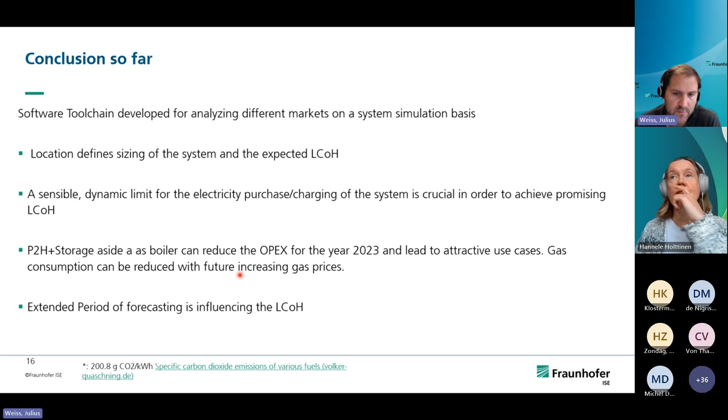So what we plan on doing further in the project is focus on how we can reduce the levelized cost of heat with the system further. On one hand, we will study potential OPEX reductions, looking at more advanced dynamic price forecasting. And most importantly, we will study potential future electricity markets.

As I mentioned, we only analyzed the year 2023, but for an investment it's important to look into the future and the lifetime of 25 years and how prices will behave in the future. Also, since we've neglected this so far, we want to look at potential scenarios for future grid fee design in Germany and other European countries.

And then, on the other hand, we will try to keep comparing this solution with other potential technologies and the combination with a gas boiler, to see how we can reduce step by step the usage of the gas boiler while still having an attractive levelized cost of heat for potential users of this technology.

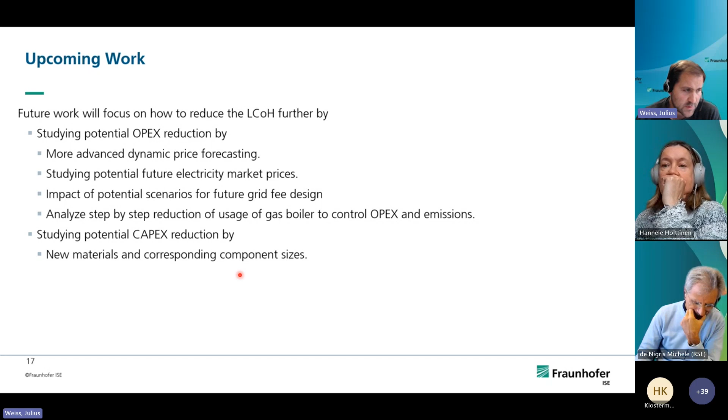And with this, I'm done with my presentation, and I'm looking forward to your questions.